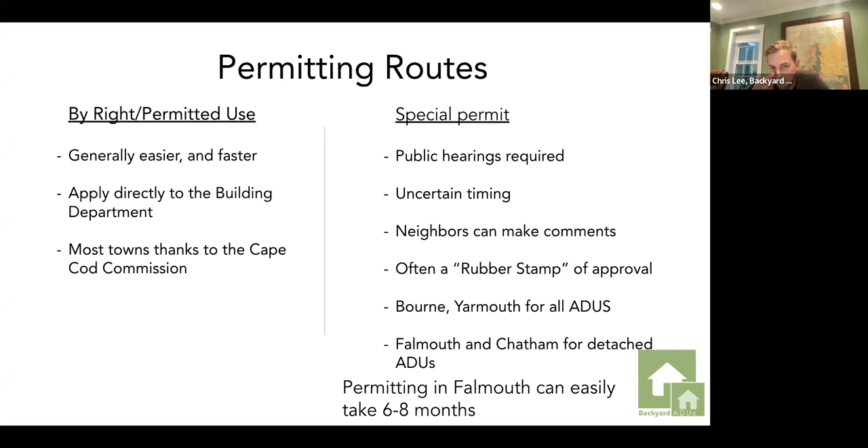There's also bonus permitting. On the Cape, there are so many overlay districts no matter what town you live in. It's something you have to be cognizant of up front because it often drives changes or adaptations we need to make for the permitting process, whether it's early on with survey work and due diligence, or septic and bedroom count. There's a lot to consider because we know the Cape is a sensitive environment, with a lot of septic systems and wildlife.

If you're near water or wetlands, estuaries or tributaries, there are bird migration corridors and wildlife corridors. I tried to upload the overlay map of Falmouth - it wouldn't fit well on a slide, but it's incredible how many colors and lines are etching across Falmouth because there are so many different districts. One we've permitted in is the Coastal Pond Overlay, which is in a lot of the Falmouth area. It has specific rules about lot sizes and bedrooms.

We'll talk a bit more on septics in a bit, but here's just an example - there are so many overlay districts. You could live on the same road next to each other, but one house could be in one district and the other's not. You can be in multiple districts. Very similar to the special permit, it's not something to be intimidated by, but something to do your due diligence on up front, so you know what's possible and what adaptations you might need to make.

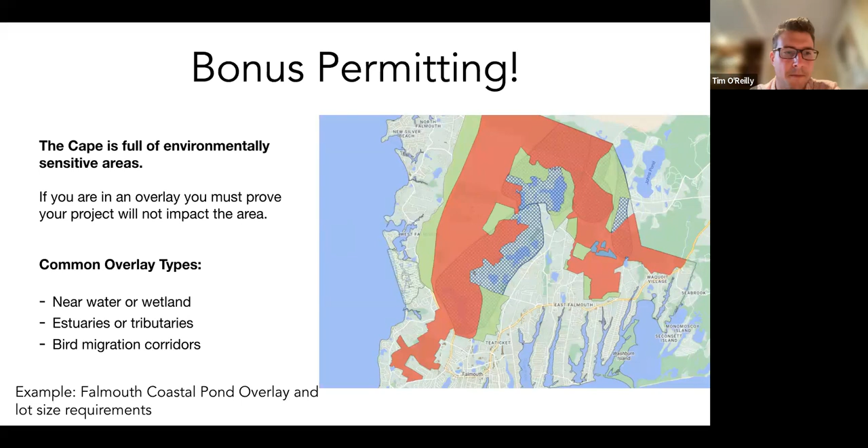This is an example - if you are near certain wetlands, like that house we looked at earlier in Falmouth that was near a pond, it required extra legwork up front in the survey phase. We had to delineate our wetlands, find where the edge of the pond was and where it went from wetlands to lawn. We had to make sure our project, including the house and other components, were outside any restricted areas, and while under construction, made sure there was no runoff into that pond. So we had to do extra work, some wetland delineation, and file all the right paperwork.

Again, not something to be totally intimidated by, just another extra step up front, which in this case we caught at the feasibility study level. So we were able to give the homeowners a heads up to say, hey, this should be something on your radar, we'll probably have to do it. And then as we move forward in the design phase, we're able to get that done.

Hey Tim, we've got a couple questions from early on here that we could probably pause and bring in. Tim from Sandwich put a couple in here, not specific to permitting, but I think you've run across it. Sandwich only allows 1 bedroom with their ADUs, but it's up to 850 square feet.

Sandwich has sort of 2 categories: an accessory apartment, which is by right, and that's 1 bedroom, or an ADU, which can be up to 2 bedrooms, I believe. To be honest it's been a bit since I've read that bylaw, but I remember they had these 2 pathways. Thinking about the permitting route, one is by right - if you have 1 bedroom you can do it by right, assuming you meet all the other requirements. The other one, the ADU, can have more bedrooms, but you need planning board approval. So it's not a zoning board public hearing, it's through the planning board.

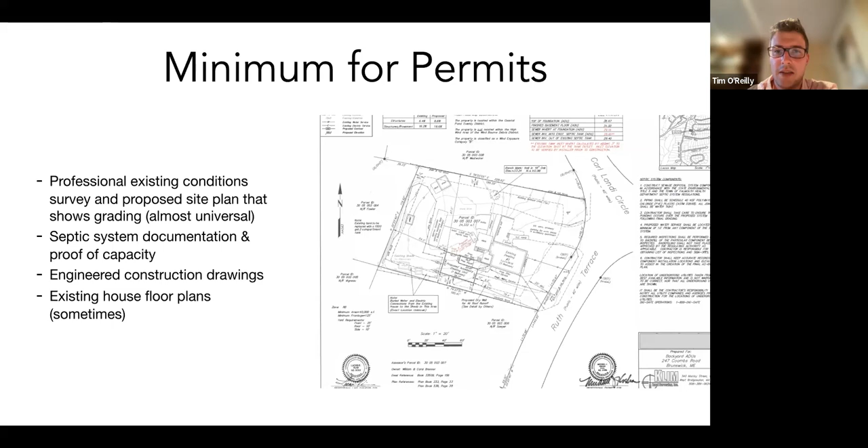I know this image is a little hard to see, we're going to zoom in and look at that in the septic section, so I'll talk more about it then. If there's any additional engineering that needs to happen, whether it's civil or environmental, that gets pulled in. And then typically, most towns we've seen, they want to see what's existing there in terms of the house, and specifically bedrooms. So we pull that in as well at that early stage. But this is an example of a finalized plan that had all the details needed, so we could take this and move through permitting.

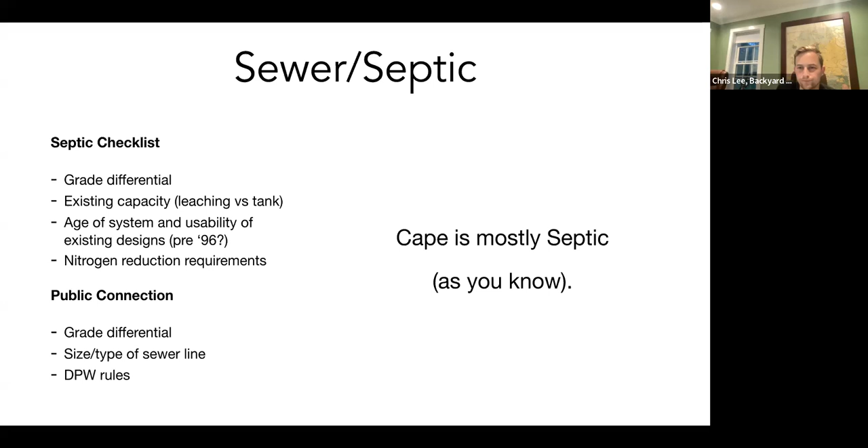Definitely. Depending on your circumstances, if you bought a house recently, you should have that Title V report. Or if your system was replaced or inspected, maybe you've had a Title V report done. The local health agent should have all the records. So if you don't know much about your septic system, you can email your local health department and get what records they have. The keys there are basically: where is it? Are there any grade constraints? The big one there is, can things continue to be gravity fed, or might you need a pump? That just has some construction impacts and costs. What's the existing capacity—that's really key, how old is this infrastructure? And what is there—is there any bedroom capacity? If we're adding a 1-bedroom ADU, can we tie into that system, or do we need to look at something else?

And again, I can't get into all the details, but across the board there are big concerns with nitrogen, and you may or may not need to look at a nitrogen reduction system, which has some big cost implications.

Yeah, so that's most of the Cape. If you are in a region that has public sewer, we're also looking at grade for that pump issue, because it does impact cost, $5 to $6 grand thereabouts. But what is the type and size of your line? Where is it in your yard? And what are the local rules to connect to that pipe and add existing capacity?

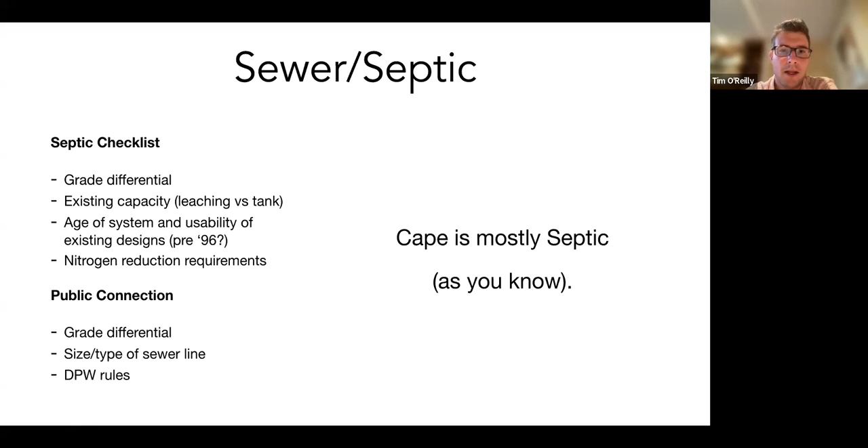This is a 1-bedroom ADU going onto a property that had a 4-bedroom septic system. Initially this existing house had 4 bedrooms, but we did a bedroom conversion, which I'll talk about here in a bit. We basically had to connect the ADU to that existing system and use the existing tank and leach field. Falmouth did require us, per Title V, each town will interpret that slightly differently, to have its own tank for the ADU.

Any questions, Chris, as we're cruising through this? No, I think that's a good example of what we're seeing most commonly, that we are using the existing system and modifying it in some way rather than doing an entirely new system.

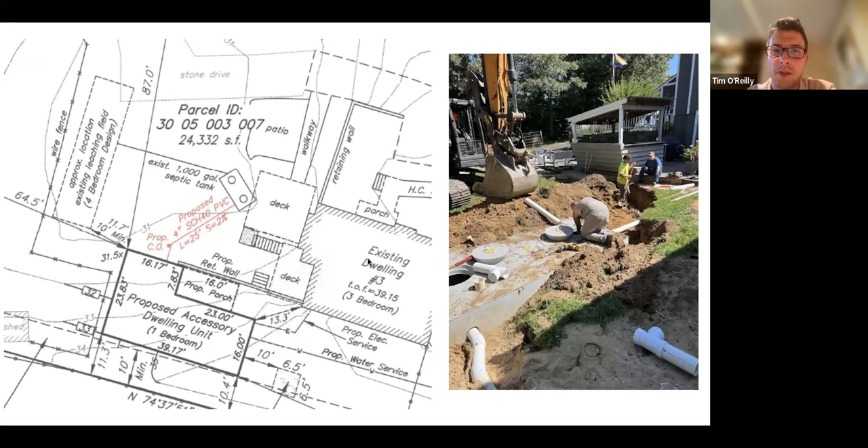A sister lives in the house with her husband, and they're building the ADU for her sister in the backyard. So 2 people live in this house and 1 person is moving in there. They had 4 bedrooms, 1 of which was used as an office but on paper is a bedroom. It has a regular 3-foot doorway.

So to convert this bedroom, to say this is no longer a bedroom in the house, we're going to remove this door, cut open the wall, change this 3-foot opening to a 4-foot opening. In this case, what the town wanted to see was also remove the doors from the closet in this room. Now what was a bedroom in the house no longer has a door. You can't put a door on it because it's 4 feet. That is now an office and not a bedroom.

That allowed us to add that 1-bedroom ADU in the backyard. So that was our way to avoid the nitrogen removal system that was over $30,000, and then go this route that, although it did cost some money to do the actual bedroom conversion work, and add that septic tank like you saw in the backyard, that was the way we were able to properly permit and do the septic here.

So that's one of our 1.5-story design paths. It can be 800 to 1,200 square feet. But if we were going to do the 800 square foot one, I think it's going to fall somewhere $350 to $425 thousand, depending on finishes and what's going on in the backyard.

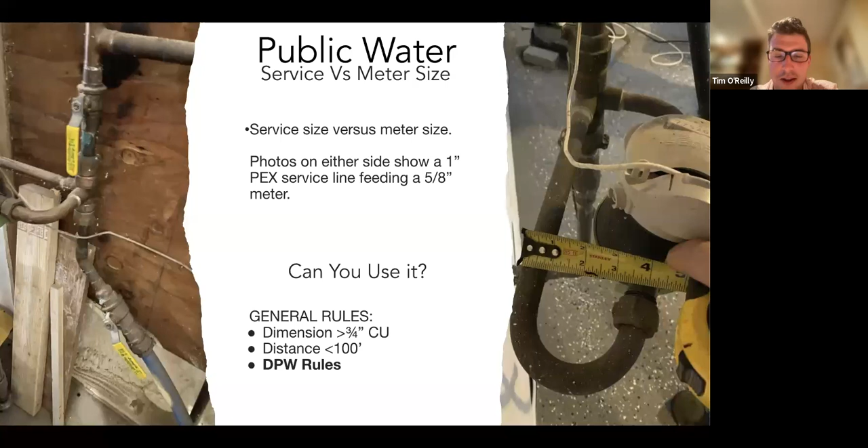The electric, generally speaking, down on the Cape, is not with the town. So if you're on town water, you're dealing with the town. If you have a septic, you're going through the health department and Title V with the town, but the electric company is its own separate thing, and also is a big pain in our side. But generally what we're doing is we're taking a new 200 amp service for our ADU. When we're doing these all-electric units, especially with electric hot water heating, we want to make sure there's enough load there so there's never any issues. So how that looks, whether underground or overhead, we'll be looking to bring that to the ADU site. Again, each one is unique.

If you do have big draw items like a pool or a hot tub, or in the existing house that instant hot water heater, we'll want to make sure you have enough at the house and then our ADU has enough. So often how we're doing that is with a second service where the ADU is not at all attached to the main house - we're going directly to that infrastructure at the street. You'll also have a second account and a second meter, so it'll be separate bills as well, which is nice.

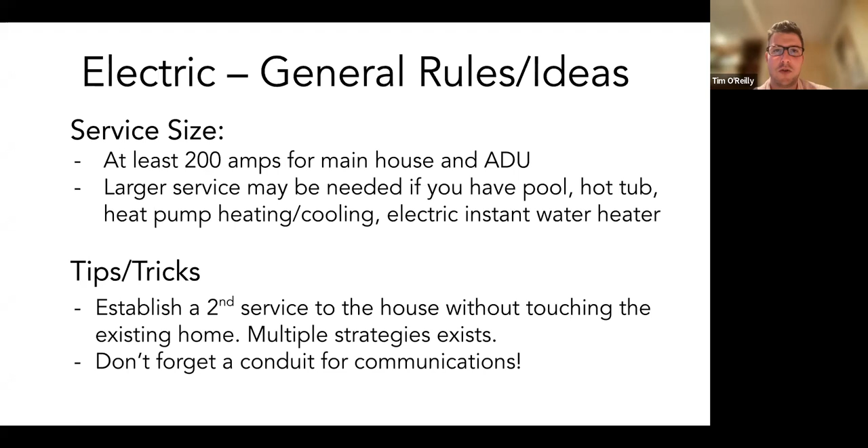And then don't forget the communications conduits. That way, whoever your service provider is will run those lines, and you can stream all the Netflix you need or join Backyard ADU webinars.

Chris, do you want to tell us a little bit more about this? Yeah, so Tim made the comment in the last slide, this is a huge pain in our side. This is a unique thing on the Cape. We know why on the Cape all the power is underground - because it's windy and they're thinking ahead, they don't want to keep putting power lines back up. We honestly wish it happened more, but it makes getting power to an ADU a lot more complicated than everywhere else in New England. The reason being is that there's a lot more variables involved. So we've got situations where the meter is not in the house, and then we have multiple underground runs that we have to evaluate and multiple sets of wires we've got to find.

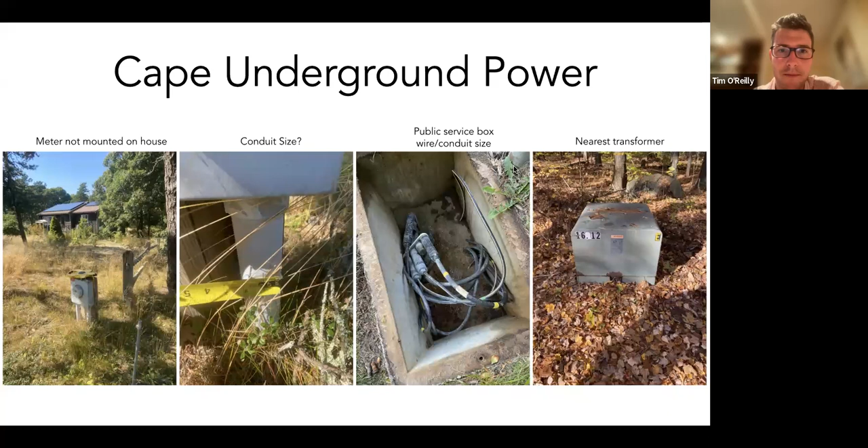All right. So we've done septic, we've done sewer, and now we've done electrical. Chris, take it away. That's it.